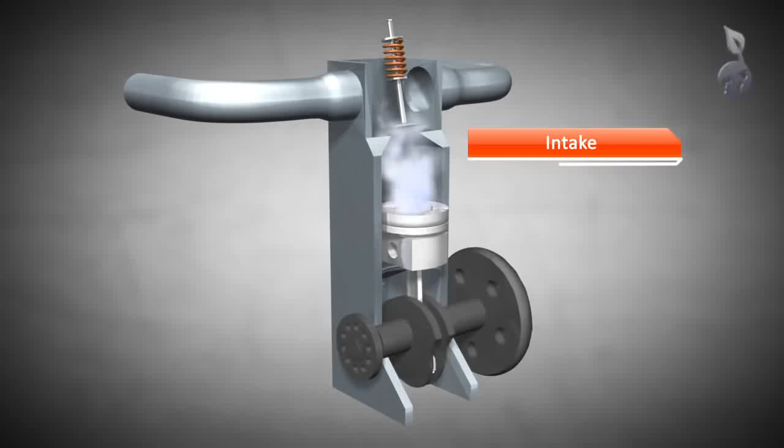In a standard 4-stroke diesel engine, air is forced into the cylinder by atmospheric pressure. This is the reason why this kind of engine is known as a naturally aspirated engine.

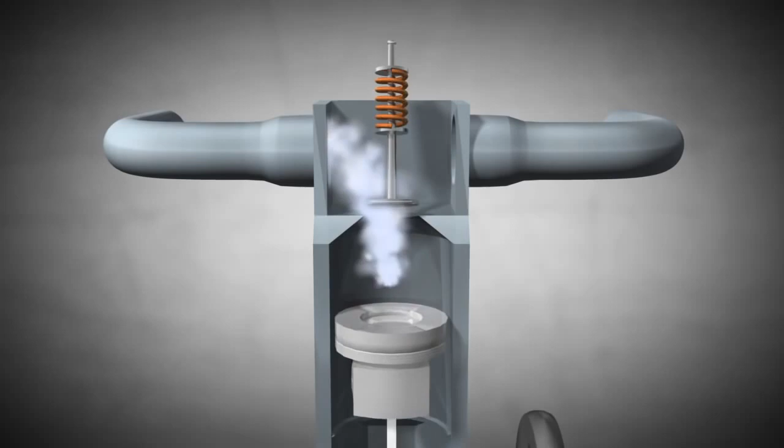At times of high RPM, for example on the highway, the atmospheric pressure will not push enough air into the cylinder. Consequently, the engine cannot run efficiently. Here, the turbocharger comes into play.

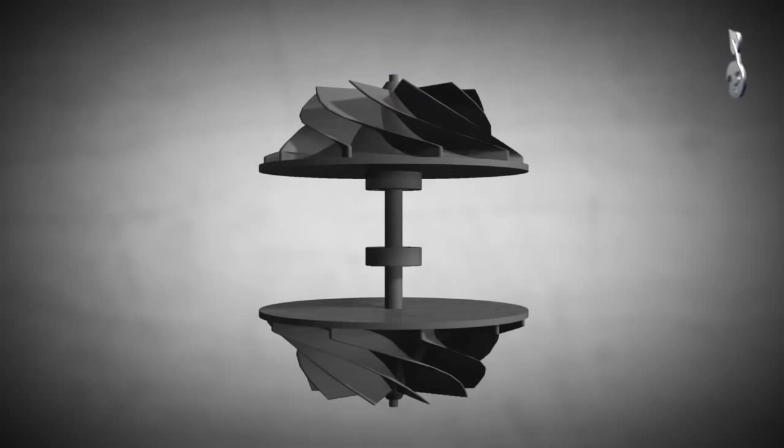A standard turbo, as it is used in boats, airplanes and cars, is composed of a shaft with a turbine wheel on one end and a compressor wheel on the other end. The turbine wheel and the compressor wheel may look the same and are covered by a housing.

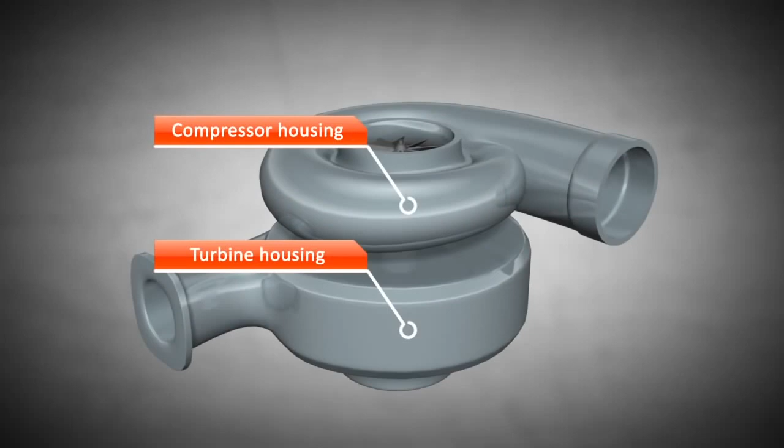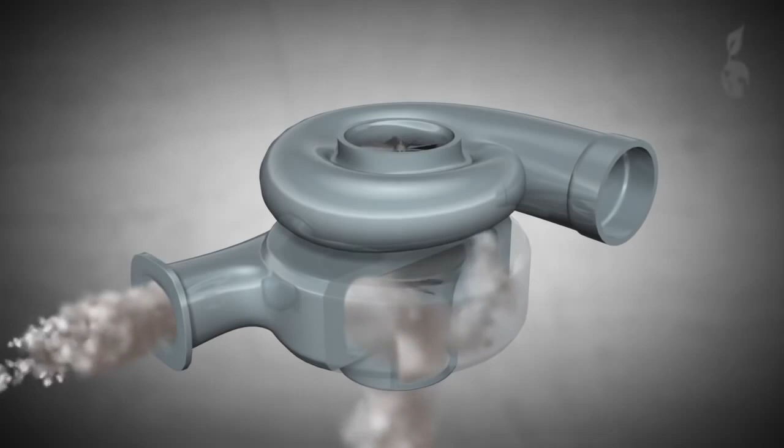The exhaust gas produced by the engine enters the turbine housing through the inlet port. At that point, thermal energy is converted into kinetic energy because of the constriction in the turbine. Consequently, the turbine is driven by kinetic energy.

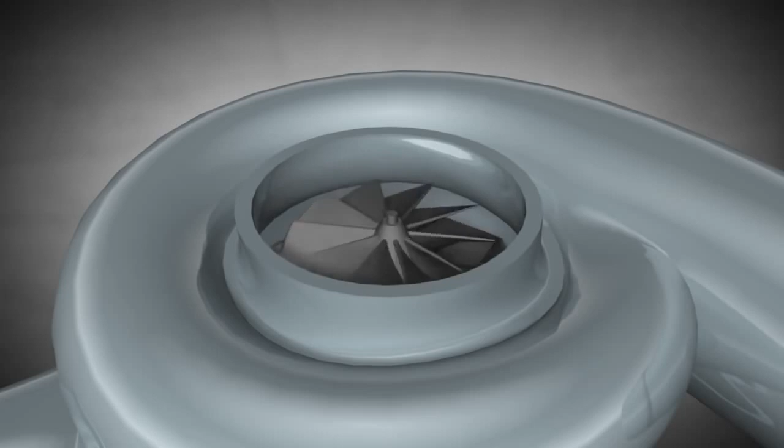As the turbine wheel and the compressor wheel share the same shaft, the compressor wheel spins at the same speed as the turbine wheel. Consequently, the compressor wheel draws in air and compresses it. Then, the air passes through the outlet port and supplies the engine with oxygen.

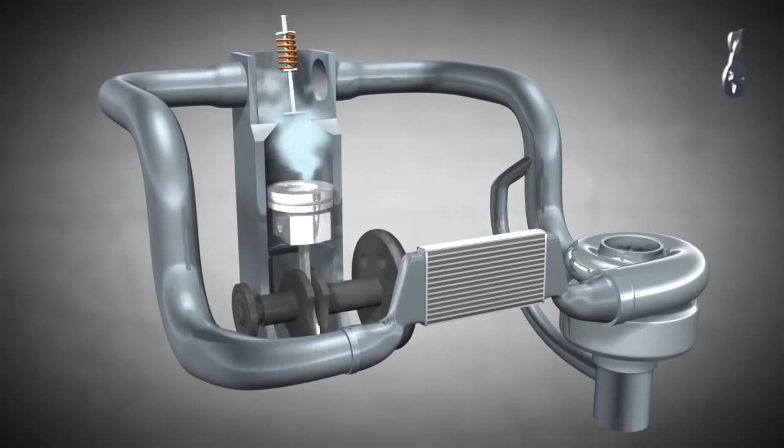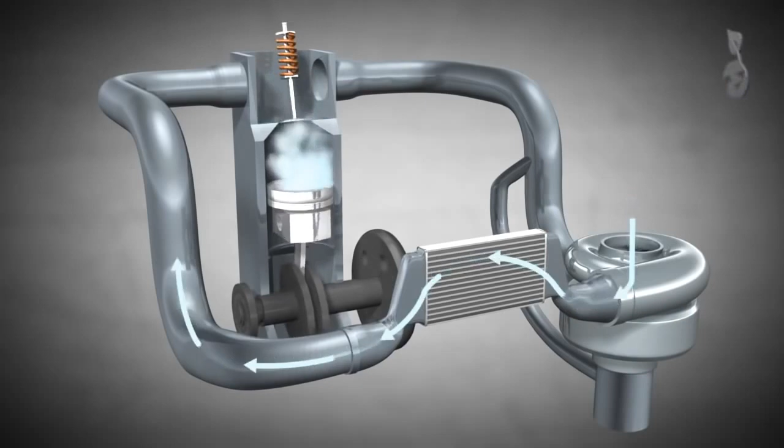Let's have a look at the turbo and other components to have a better idea of the principle at work. The exhaust gas enters the turbine through the inlet port, drives the turbine wheel, and exits the turbine through the outlet port. Hereby, the compressor wheel draws in air, compresses the air, and pushes it to the engine.

Engines that have a turbo are known as turbocharged engines. A turbo only works efficiently if other components are part of the entire system.

We need, for example, an intercooler because the air heats up when it's compressed. So the intercooler will cool down the hot air coming from the compressor, ensuring that more oxygen reaches the engine. That makes the engine much more efficient.

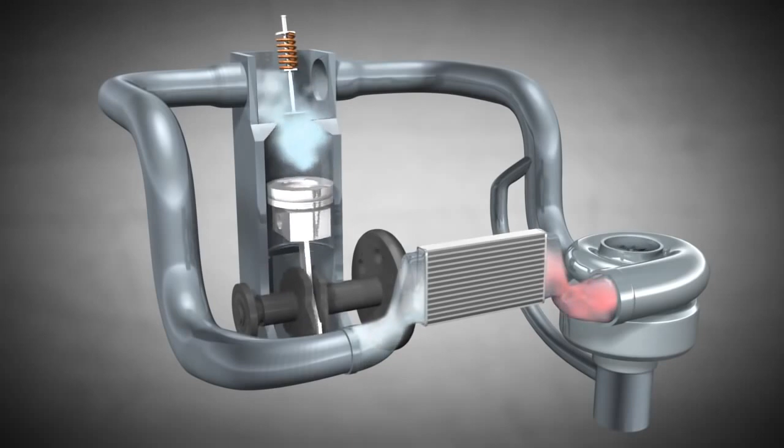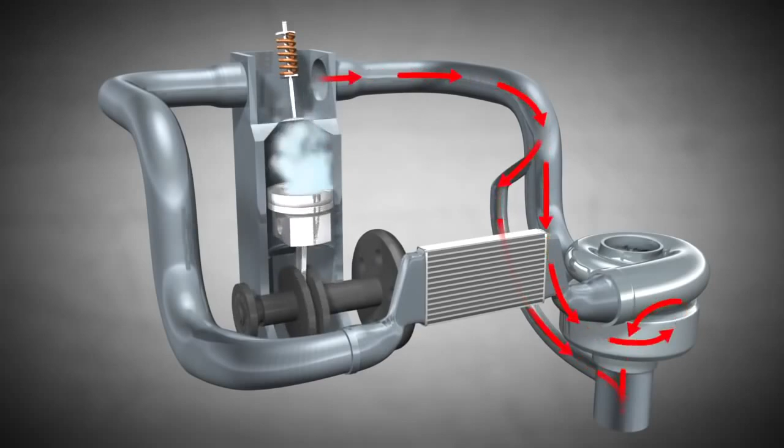Furthermore, a valve, which is also known as a wastegate, is used to divert exhaust gas away from the turbine when too much exhaust gas is produced by the engine. So it limits the rotational speed of the turbine wheel and consequently the compressor wheel so that the turbo...